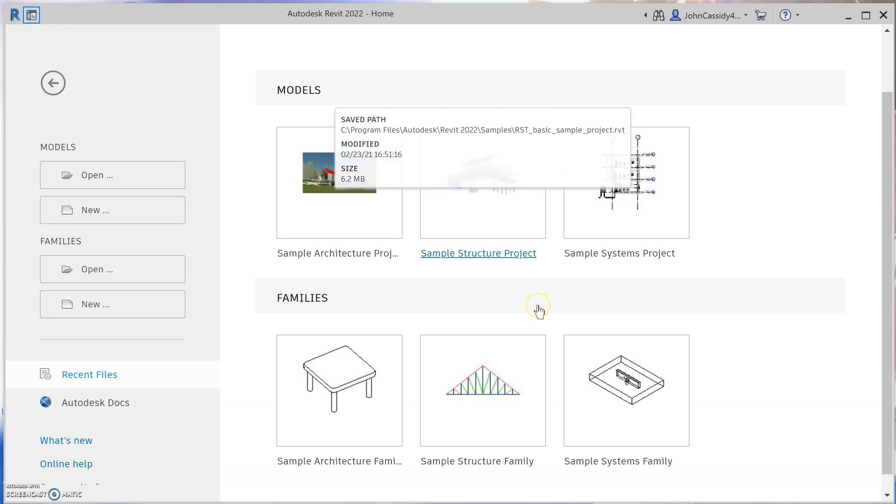In the middle here, you can see there's a sample architectural project, a sample structure project, and a sample systems project. Down the bottom, you can see examples of what families are - items that you can use within your project. So sample architecture families, obviously furniture, and sample structures, and sample systems.

Now let's have a look at the sample architecture project so you can get familiar with the layout of everything on the screen that comes up. Let's start from the top and go anti-clockwise, down the middle, then down the left, and then along the bottom to show you all of the things that you're looking at.

Across the top here, you might have a series of tools. When I open, they're already open here. So we've got this, it just goes back to that home. Let's click it again. This opens, this saves. We can print the screen.

We can measure between two points. We can do some alignments and tagging, text, go to the default 3D view, change line weight and switch windows. We've got obviously the Autodesk account there, and we've got some search help as well. And then there's some app purchases and so forth, and some extra help there for the software.

Now, along underneath that, we've got a series of tabs. There are a lot of tools in Revit. The key tabs that I will be focusing on are the Architecture tab, and Massing and Site, and then occasionally View. So Architecture, Massing and Site, and View. You can click on each one of these and it brings up different tools - each one is its own toolbar.

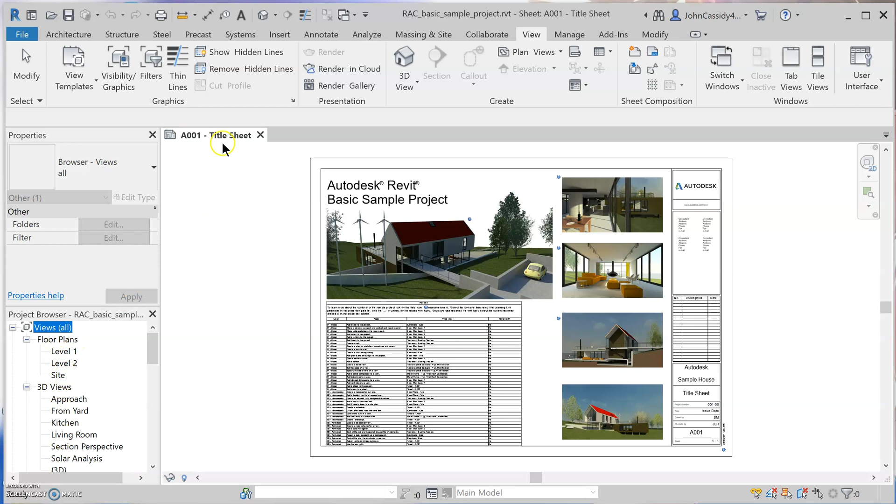If you've got this project open, you can actually go and double click on some of these other things in the project browser, and they will open up in new tabs. So if I click floor plan level 1, you can see that's now bold because that's the one I'm actually looking at in my stage area. You can see level 1 has opened, but I still have that original title sheet. This is all part of the same project.

All right, so coming down across in the Architecture tab, we've got things like wall, door, window, component. So you can see these are the key features of making a building: rails and stairs, and if you want to define spaces and rooms, and then create openings in walls, set up grids and so forth.

That's quite important. The other one I'm going to be looking at is Massing and Site. This is where you put down your surface, the topographical surface that you will be building on. Of course that's going to be very uneven because it's a very natural sort of slope or whatever. Then on the topo surface, we'll create a building pad, which is just a flat area to build upon.

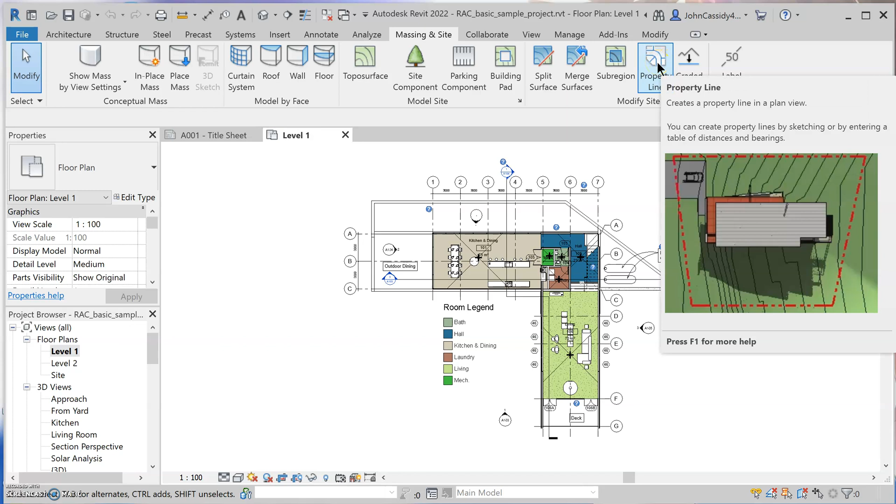There's some other things like property lines, so you can define the edges of your property, which is very important, which you're going to do as well. I'm going to show you how to do that in a later tutorial.

Now, the last one that I'll be focusing on is view. View is important because it's got the user interface tab. We've also got under 3D view, the default 3D view, and a camera - you can set up a camera location for a very specific view of your model, and you can create walkthroughs. It's also got the ability to create sections, so if you want to do a cutaway view looking into part of your building, you can create sections in there.

You'll notice when I click on one of these tabs, quite often an extra set of tools will come up. That's sort of like a sub menu within a tool set. Okay, let's just go back to architecture, keep it simple.

Now, if I select wall, you'll notice the properties change depending on what I've chosen. And here is this sub menu that's come up, and it's just all related to creating walls. So going back to the architecture tab, that's our little modify place wall tool, and it's got a lot of different things there.

And same with doors, you can see here in the properties again, it's changed. There will be some already loaded in doors, and you can always load more - we'll look at that at a later time - along with all of the different properties related to specific doors. So if I choose a different door, the properties below will change for that particular model.

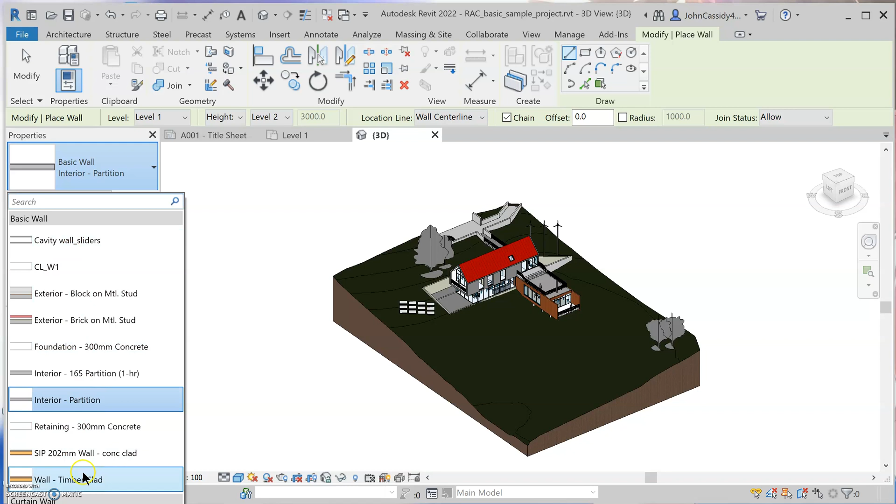Now under properties, you can see wall has a lot of already pre-loaded default wall types that you can even edit and create custom ones, which we're not going to do at this time. Down here in the project browser, you've got all of the different ways you can look at your model, or your project.

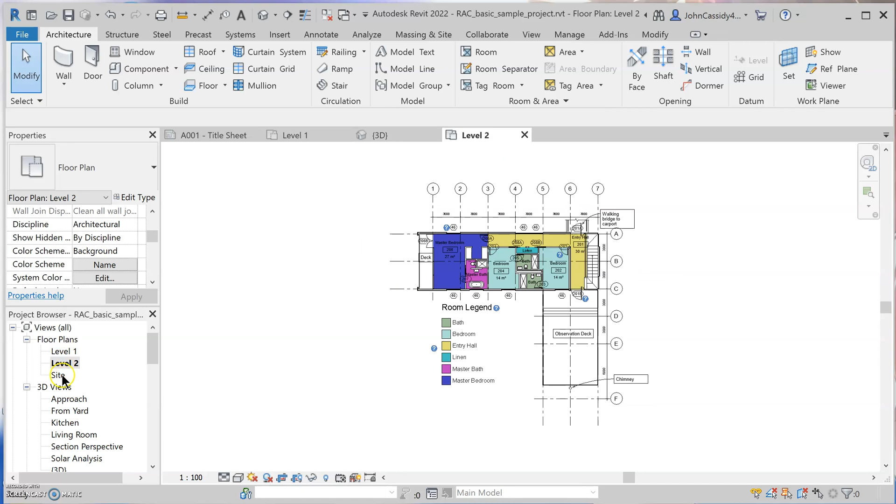The first one is floor plans. So under floor plans, you can actually add extra levels. If I click on level 1, you can see the floor plan of level 1, level 2, and the full site plan. In 3D view, in the sample project, they've got quite a lot of 3D views set up.

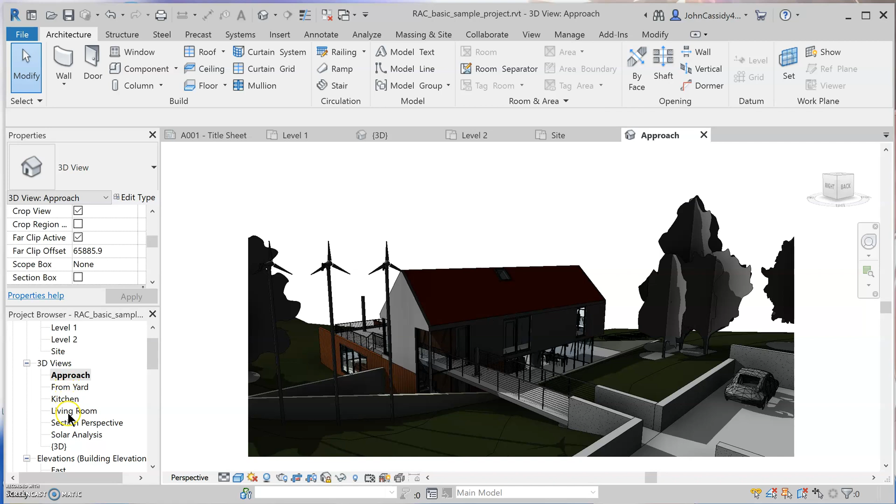When you first create your own project, it won't have any of these set up - these are being actually created specifically for the sample project. So you can click on, that's obviously the approach to the building, and the front from the front yard, from the kitchen, living room, and so forth. So these are camera views that have been set up.

Obviously, this has been set up in a render mode that takes a moment to load. And section views, a solar analysis, and a 3D view. It finally loaded - so there it is. It's created an outline render, just a preview render, not a finished render at all.

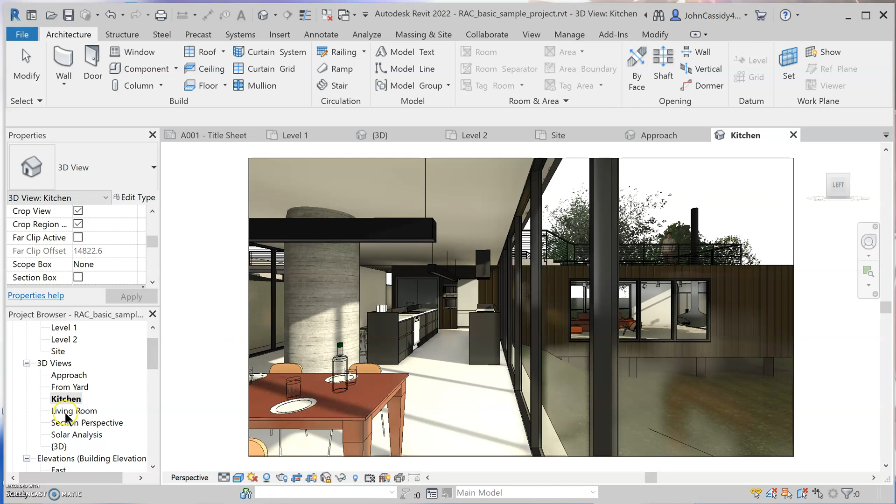But you can preview some of the materials that have been placed on the surfaces, and there's some other things. So living room - it's probably going to take a moment. Here we go, the living room camera, and the 3D is a dynamic view. It changes all the time - it is not a set camera, a fixed camera location.

Okay, so under 3D views, you've got that. And you'll always note that when I click on one of these, it opens a new tab up the top, but it also makes that particular view bold. So right now I've double clicked on elevation east, and I can see the whole project from the east side, and it's in bold, so I can tell what I'm looking at currently.

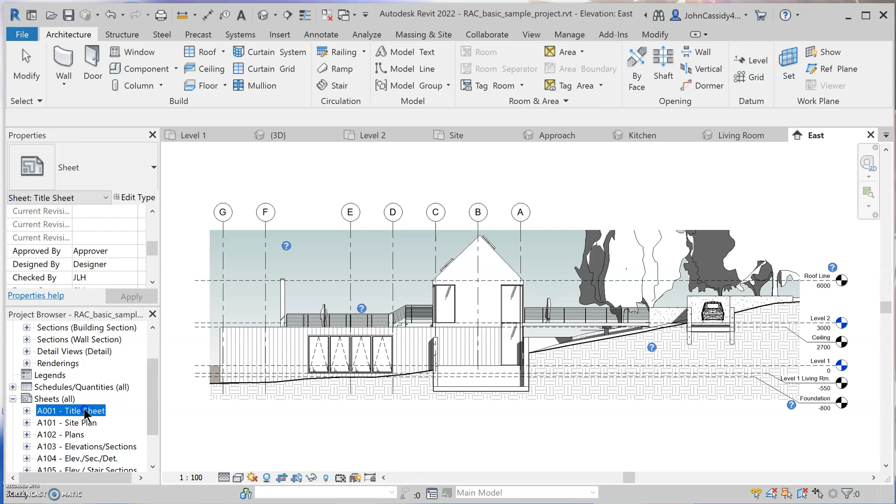And so you've got elevations, you've got sections, they've got other detail views, they've got some rendering. They've also got legends and schedules. Schedules are the list of all of the items in your project - itemized, so you could actually go out, it's like a shopping list. And then it's got the sheets. Now, the sheets are very, very important when it comes to presentation of your project, and you need to set up various sheets.

To actually print out and present your project for the various audiences and what they're expecting, there's a lot of settings when it comes to presenting this appropriately. So sheets, and then the families - that's all of the parts within that project - and then groups, which we won't worry about, and any linked files.

The Project Browser is very handy to be able to move quickly between the different views of your project. Just be aware when you go to close your project, it will close all the tabs. This is not cloud auto-save, so it is recommended that you save your file regularly. The other thing that's helpful to note - let's go to a 3D view.

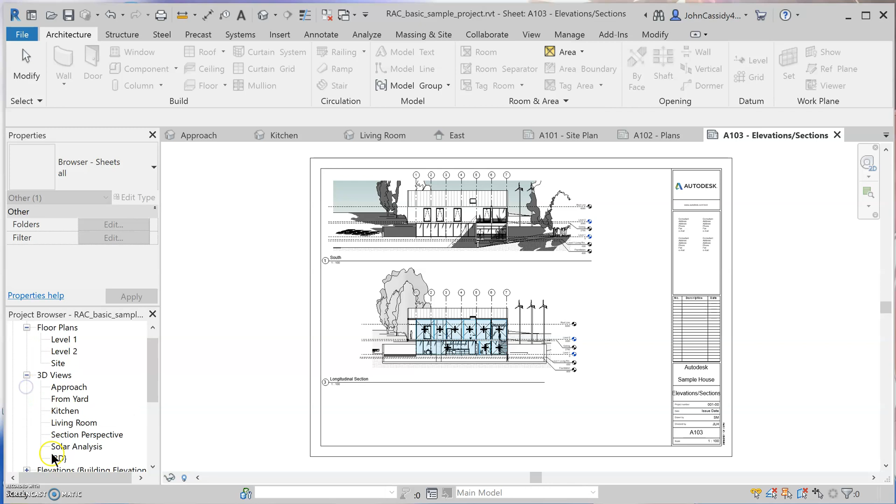When you're in an appropriate view, down the bottom we've got some information which is very helpful. We've got the scale - so if you change the scale, you can click on this and change the scale you want to preview at. If I was on Level 1, and I change that scale, it will probably change how everything is previewed.

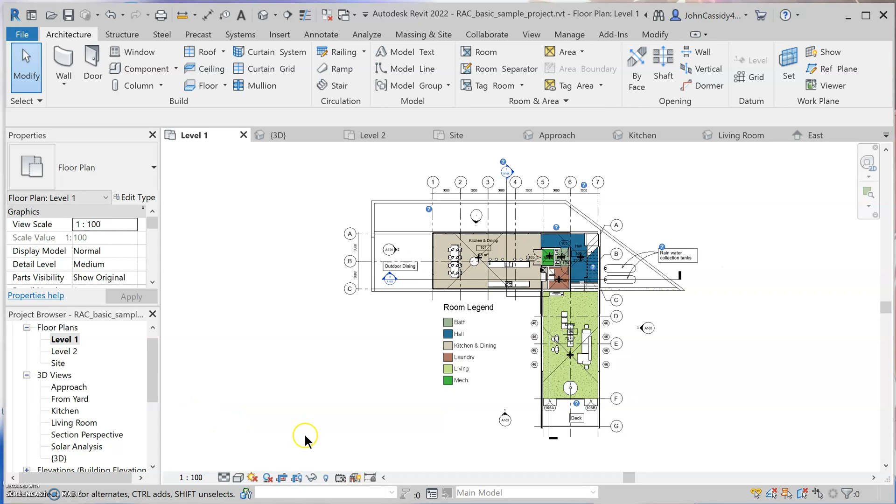Now the next one along is detail. If I zoom right into the wall types, you can see there's a cross section of what this wall looks like. In view, I might change this to thin lines so you can see clearly what kind of cross section I'm looking at. Here in detail, if I change this to coarse detail, you'll notice all of that detail on the wall is gone. If I go to fine detail, it shows every part of that cross section and all of the materials therein - each one represents a different material in that structure. So we're just going to leave it on medium.

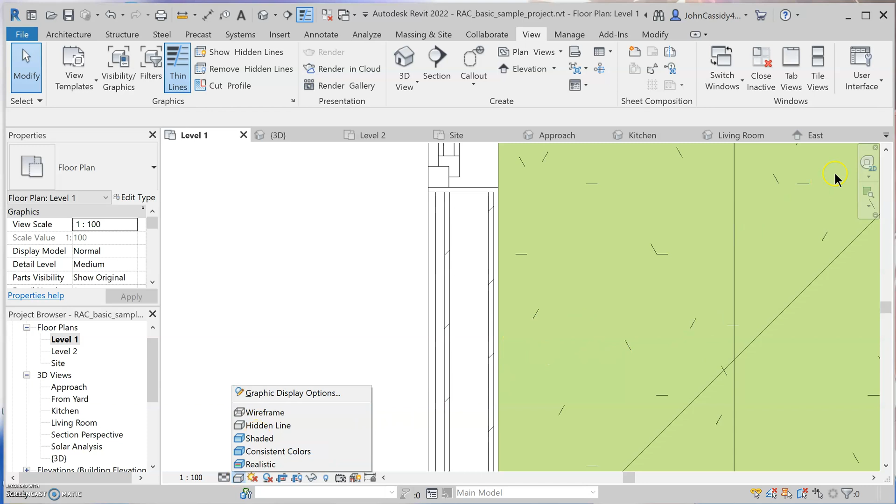This one here is the graphic display option, so obviously how it's previewing. So just going back out to the 3D view. You can also click Home here, and that will home it to its original view of how it was looking.

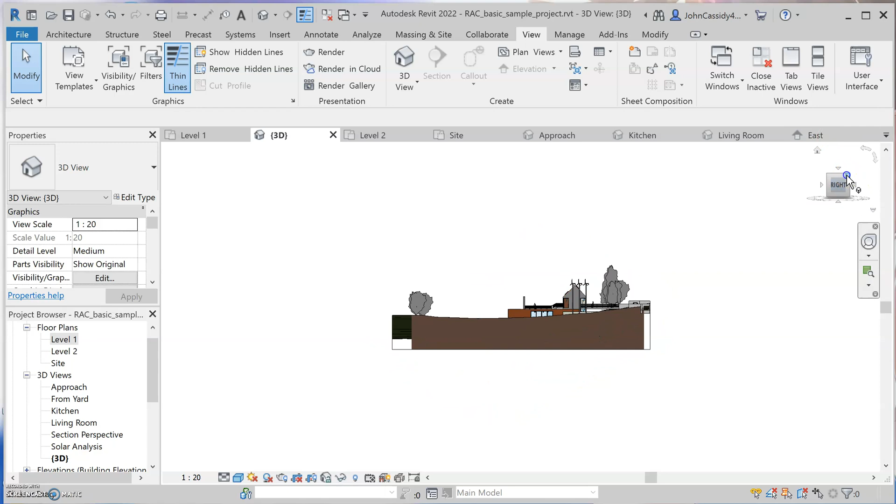You can also use this little cube to rotate around and look at it from different points of view - click on the faces, click on the corners, on the edges, looking at it from different perspectives, different angles. So I'll just keep going until I'm happy. Oh, that was a pretty good one.

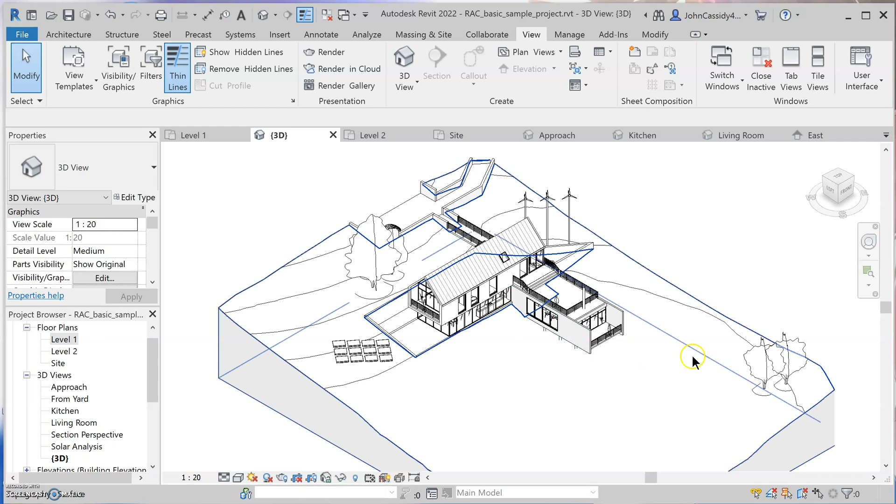All right, so now down the bottom, if I wanted to change this visual style and go to hidden line, you can see all of the color is gone, and it will make it easier and faster to move around my project.

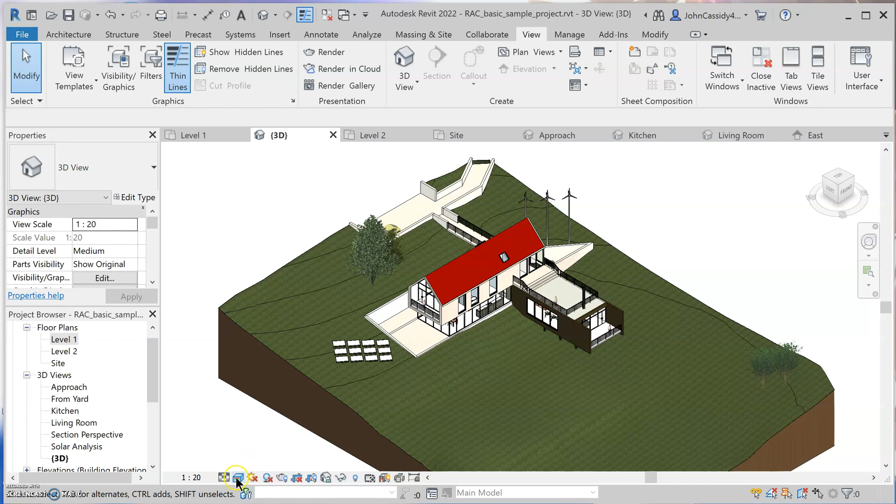If I tried to look at it in realistic and tried to move around my project, every time I go to a different perspective, it has to render all of the realistic textures and things like that. So it actually makes the project more laggy and creates a bit of a lag. So we usually keep it on hidden line or consistent colors while you're working on the model.

Next over, the sun path, shadows, rendering dialog - so when you're ready to do some rendering, some crops, a crop region. This is also helpful if you want to hide something.

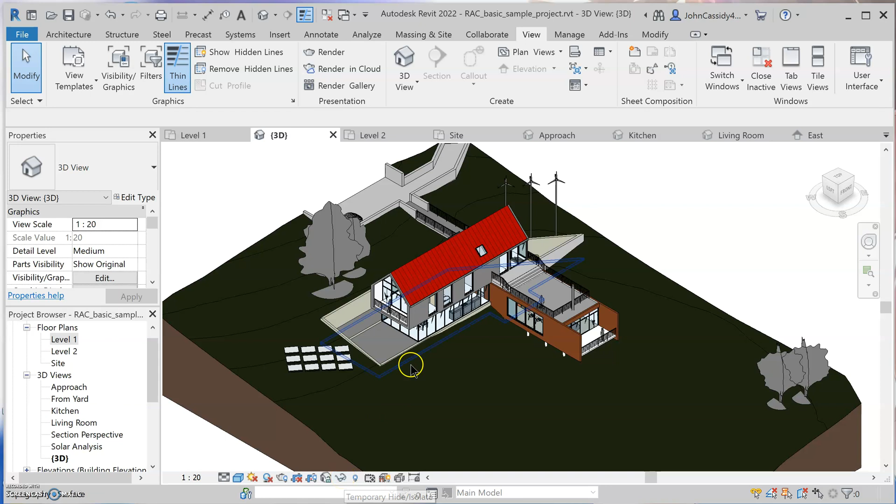So if I wanted to select a wall and do a temporary hide, I'll hide element. Now I can look inside without that wall being there, and then I can reset it. You can see it's turned blue - reset - and it's come back again, it's in the room again. So that makes it easier if your view's obstructed by something.

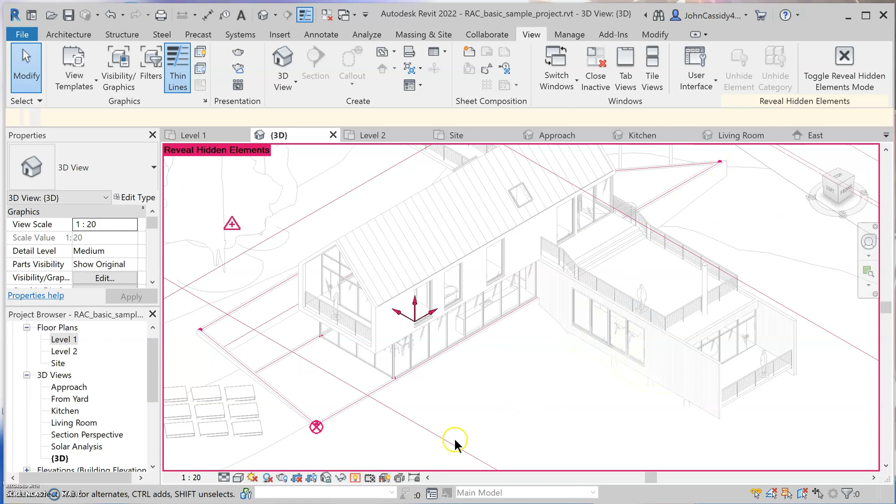And here we've got reveal, and it would show the list of everything, all the hidden elements - it would just show anything that might have been hidden. I'll just go back. Here we've got temporary view properties and things like that, so we don't need to worry about those for the moment.

Down the bottom, click - this is actually quite useful, this was the status bar. So down the bottom you've got the status bar, and it gives you some information related to what you're currently doing - a little bit of instruction if you're not sure what you're meant to be doing, like if you're using some tool or something.

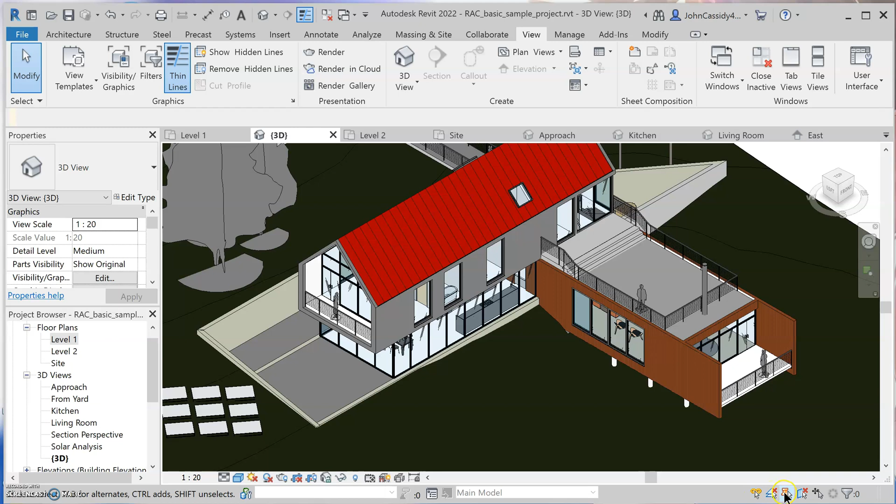This down here is linked elements, just getting rid of that - linked elements, selected links, underlay and pinned and things like this, and elements - select elements by face.